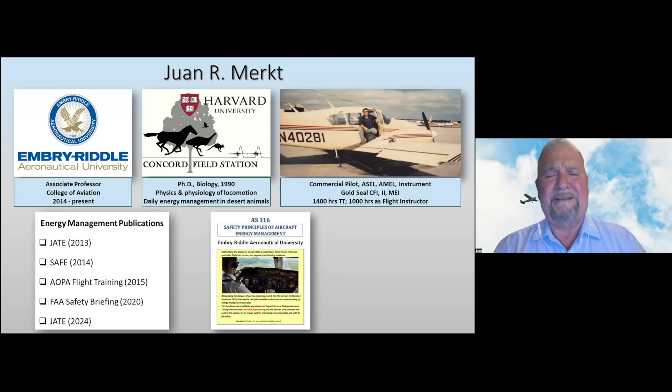Along the way here, I had this incredible opportunity, and I'm so thankful to Embry-Riddle for it, to design and teach my own course on energy management, and I've been doing that since 2018.

At some point I got the opportunity to collaborate with the FAA and other people, and help write Chapter 4, Energy Management. And the article from 2024, the last one I mentioned on the list, Nick is going to put the link to that paper. So if anybody is interested in reading it, please feel free.

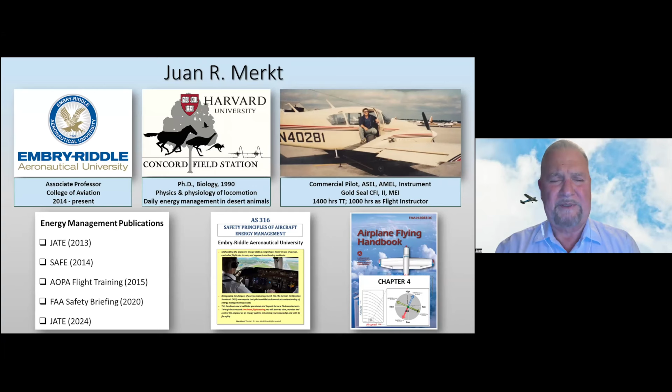Great, thanks. I do want to thank one person especially, Dave Cecil with the FAA, and he might be in the audience here. Dave was an incredible support, both on the chapter and the Airplane Flying Handbook, and he's also a co-author on that latest paper that I mentioned. Anyway, that's a little bit of my background.

So what I'm going to do now is show you an outline of what we're going to be discussing. The first thing is going to be a definition of what MCA is. Now, since energy management is so critical in performing this maneuver, I want to go over some basics, as I call them. To learn more about this maneuver, I'm going to use an approach I call the top-down approach to teaching principles of flight. But I'm going to contrast that first, before I get into MCA, with what I call the traditional bottom-up approach. Once I do that, we'll go through the top-down approach for teaching the essential elements of MCA.

So what is MCA? If you look at the Airplane Flying Handbook, the definition is right there in the glossary: an airspeed at which any increase in angle of attack, or an increase in load factor, or a reduction in power would result in an immediate stall. That really means this is the slowest speed that we can fly without stalling the airplane.

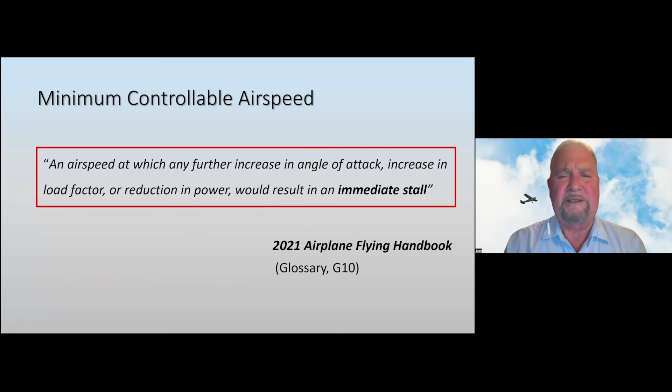Now, as David already mentioned, MCA has been incorporated now into the CFI ACS. What I'm going to show you here is basically just some of the key elements of the tasks in the ACS, not everything, just the important things. As far as the reference, I believe Nick has already posted that reference on the chat.

The first thing is knowledge. Again, there are many elements as part of the knowledge requirement, but the important thing here is that the applicant needs to be able to demonstrate knowledge by describing and explaining the flight characteristics and the aerodynamics associated with this maneuver.

Now, in terms of the skills, the applicant has to demonstrate the maneuver, how to conduct it both in clean configuration and landing configuration. The reason I put the clean configuration in red is because I'm going to be focusing on the clean configuration MCA, just to keep it short, I guess.

The airplane is going to start at some cruising speed, let's say maneuvering speed, and you're going to slow down the airplane and be able to maintain that speed at which any further increase in angle of attack, increase in load factor, or reduction in power would result in an immediate stall. Now if you look at the ACS, the FAA doesn't use the term MCA or minimum controllable airspeed, but you can see the definition matches exactly what's in the airplane handbook as far as MCA. So we know that's what they're talking about.

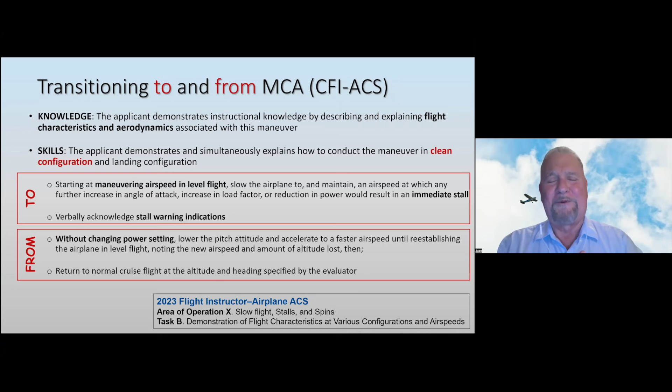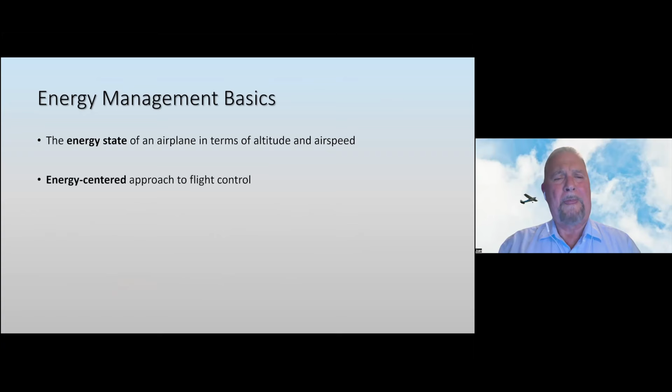I want to go through some energy management basics here, because to me energy management is essential to perform this maneuver safely and effectively. Energy management really is all about managing altitude and speed. Some of the basic concepts I want to cover are: what is the energy state of the airplane in terms of altitude and speed? What's an energy-centered approach to flight control? And once we do that, what is the energy role of the throttle and the elevator to manage altitude and speed? Finally, we're going to put together just 3 simple rules for managing altitude and speed.

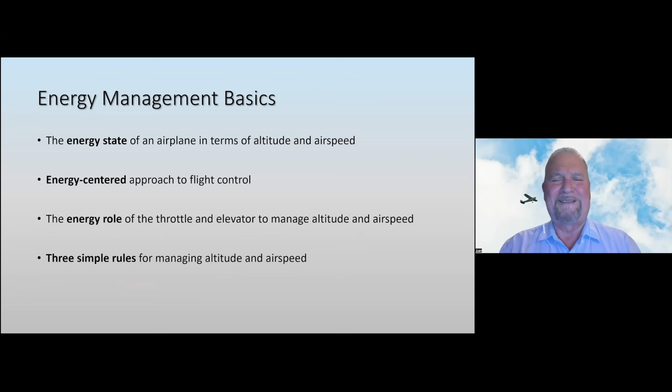So as you can see, everything is about altitude and speed. Let's start with the energy state. What is the energy state of an airplane? It's all about the total energy, the energy in altitude plus the energy in speed.

Again, if we want to visualize the energy state of the airplane, the best thing we can do is show this energy state in a chart that shows you what the altitude and what the speed is. And by the way, I didn't come up with this idea — this goes back all the way to the 1960s. John Boyd, many of you may have heard of him, developed the energy maneuverability theory to help fighter pilots do better in air combat. So it's all about air combat tactics, but to me this is a great way to visualize the energy state of the airplane.

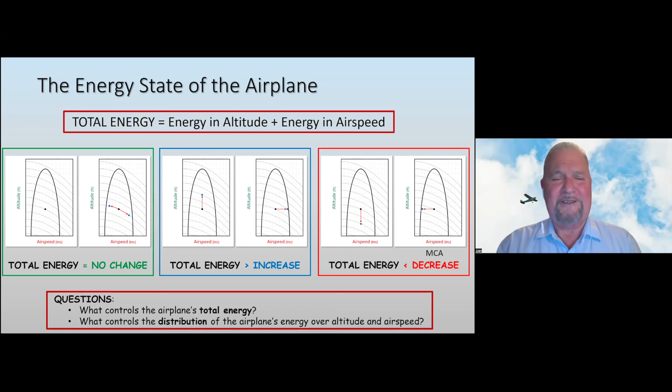So the two questions I have are basically: what controls the airplane's total energy, and especially the change in total energy? And what controls the distribution of the airplane's energy over altitude and speed?

Hold that just for a second there, Juan. I just want to grab a couple of things here in the chat. Okay, somebody's saying, what are the lines on the energy map, constant energy?

So I think you define that. Yeah, that movement on the left one is constant energy. These curved lines here are actually called energy height lines, and they represent the energy exchange trajectory. So when you're trading altitude for speed or speed for altitude, the airplane will follow that trajectory, and you're not changing the total energy, you're simply exchanging energy.

So you're going to be either losing altitude to gain speed, but the total energy stays the same, at least initially, or trading speed to gain altitude, in which case you're losing speed to gain altitude. So the total energy stays the same.

Again, somebody asked, is the horizontal line true airspeed or indicated airspeed? That's probably not really going to matter. Yeah, no, it doesn't really matter. Okay, we should keep moving so we get through all this.

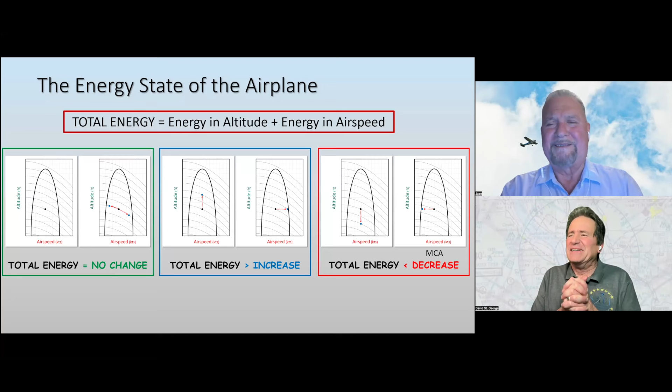I know you've got the two questions here. So I'm actually going to now focus on what I call an energy-centered approach to flight control. And the diagrams I just showed you, we're going to come back to those as we make the case here. But the point here is this: with an energy perspective, the apparent contradiction in the role of the controls can actually be resolved, making it easier for new pilots to master altitude and speed control.

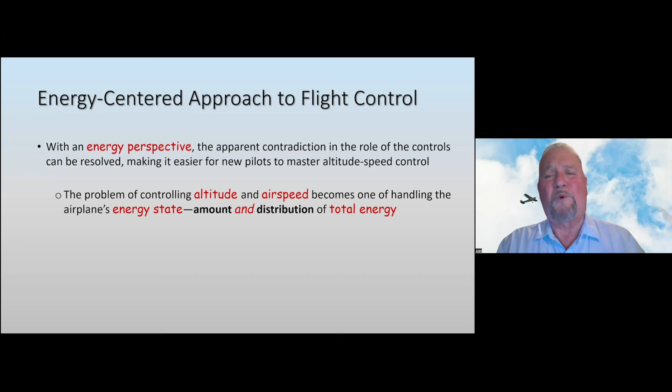The problem of controlling altitude and speed then becomes, from an energy perspective, one of handling the airplane's energy state. That's the amount and the distribution of total energy. So instead of asking what controls altitude and what controls airspeed, we should actually ask what controls the airplane's total energy and what controls the distribution over altitude and speed. I know this might sound a little abstract right now, but let's put this in a way that we can visualize what's going on here.

And what I'm going to do here is use an analogy. First of all, I'm going to show you the primary role of the controls. This is the throttle. The throttle, by changing thrust, is actually the total energy control. And the elevator, by changing pitch, is actually the energy distribution controller.

Now what I'm going to do is use an analogy, as I said before, to show you exactly what is going on here with the throttle and the elevator. This is a reservoir analogy. As you can see, the airplane is going to gain energy coming from the engine in the form of thrust. The throttle controls thrust. And the airplane is going to lose energy through drag.

Now, obviously, if you increase the amount of thrust over drag, if you add power, if you make thrust more than drag, you're going to have an excess amount of energy that is going to go into either speed or altitude. Now, which way is it going to go? That depends on the elevator. The elevator is going to be there to transfer that excess energy into either speed or altitude.

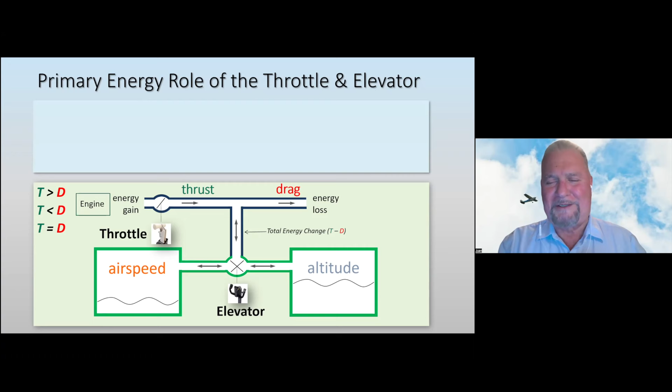Okay, now one way that we can make sense of this a little more without getting too much into math - this is a very simple equation, I guess. It's an energy balance, okay?

It simply tells you that the difference between thrust and drag is going to determine a change in total energy. If you make thrust more than drag, you have a positive excess amount of energy that can go into speed or altitude. If you have less thrust than drag, that's going to be a deficit, and the airplane's going to have to lose energy.

Now, on the right side, you actually have the distribution of the change in energy - the change in energy distribution in speed or altitude, okay? Now, the throttle controls the left side of the equation, and the elevator controls the right side, okay?

So again, hopefully that starts to make sense. And that's a good slide to take a screenshot of, because it makes sense. It puts the whole thing into context later. Yeah, I love that analogy, Juan.

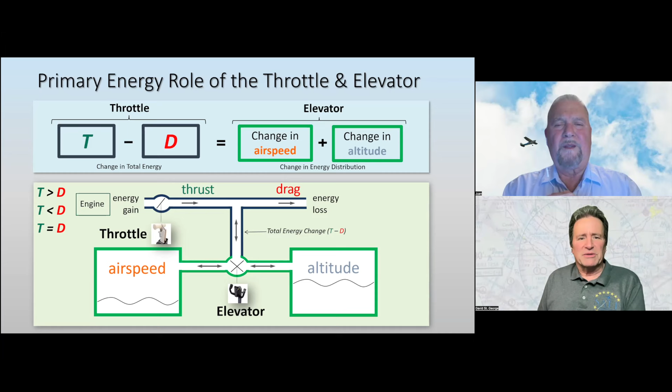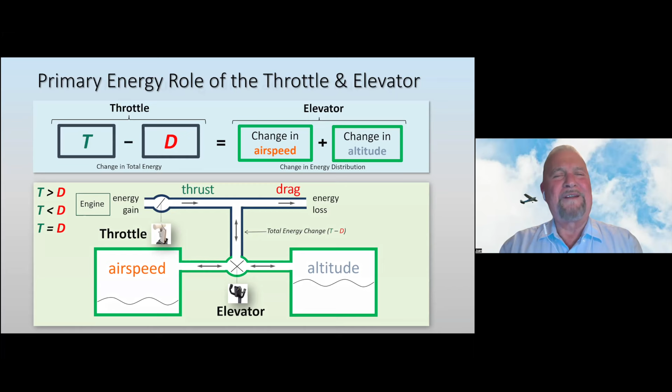That's perfect. Thanks. Now, one thing though is, and actually you asked me to put the slides that I'm going to be showing you now back. There is a little bit of confusion as to the role of the controls. I understand that, okay, but so I'm going to address that right now.

There is actually a power pitch coupling that can lead to confusion, okay? And this is the problem here. It actually has to do with the thrust line and whether the thrust line is below the center of gravity of the airplane or whether it's above, and I'll show you that in a sec.

But because of the thrust line in many airplanes, like the Cessna 172, is actually below the center of gravity, when you add power and you increase thrust, the nose is going to pitch up too.

But what if you're flying an airplane like this, where the thrust line is actually above the CG? When you add power in this airplane, the nose is actually going to pitch down. So the point here is that...

What is power doing and what is pitch doing? If you see both happening at the same time, we need to make sense out of that. And one way where you can actually...

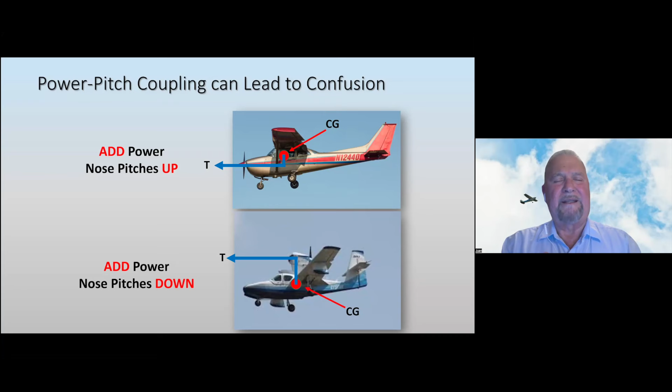Understand the independent role of the throttle in changing power and the elevator in changing pitch is by actually doing something that I've done in my class, and I've actually even tried it in the Cessna 172, and it seems to work pretty good.

That is to demonstrate the primary role of the throttle and the elevator, okay? But to do this, you have to make sure that the airplane is maintaining a constant altitude and speed, you're trimmed, you're stable, right? And then we're going to do this.

First, you might want to change the throttle setting, but you're going to keep the pitch constant. That's the key. You might actually have to, if you add power, for example, push forward on the elevator just to keep the nose where it is. And with the elevator, we'll do this all the time, right?

All we need to do is just change the pitch and keep the throttle constant. Okay, so see what happens. Let's look at the throttle first. When you change the throttle and keep the pitch constant, this is what you will see. When you add power, both altitude and airspeed increase. And when you reduce power, both altitude and airspeed decrease.

Okay, now if we do the same with the elevator, by changing the pitch without changing the throttle, we know this: you pitch up, altitude goes up, speed goes down. If you pitch down, altitude goes down, the speed goes up.

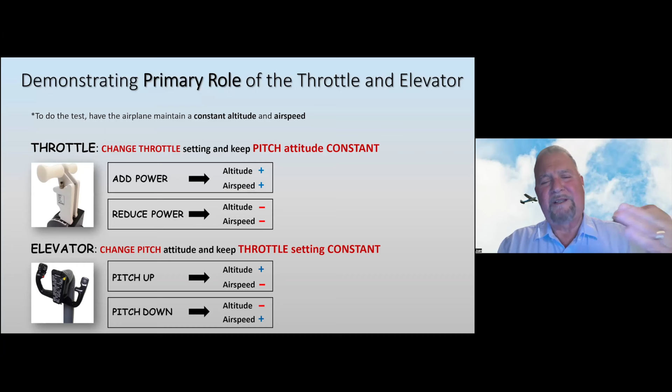In other words, you can see that the throttle is there to change the airplane's total energy, but not the relative distribution - they both go up or down in the same direction. But when we do the same with the elevator, the relative distribution is going to change - one goes up, the other one goes down, right? But the total energy, at least initially, in the short term, actually stays the same.

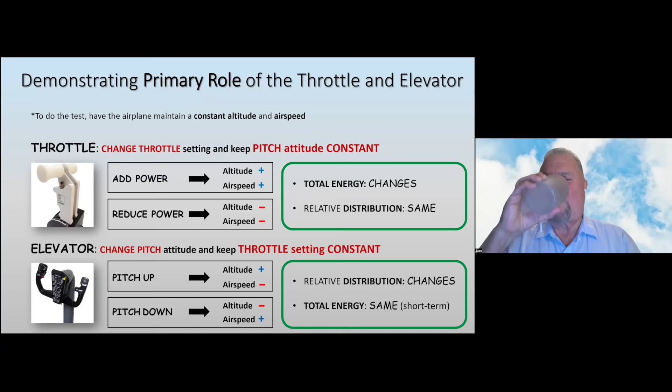As I've said many times about the short term, when you change the pitch and you change the speed, what happens is that eventually drag is going to change. That's going to affect the T minus D, the thrust minus drag, and you might actually increase or decrease the airplane's energy by changing the drag.

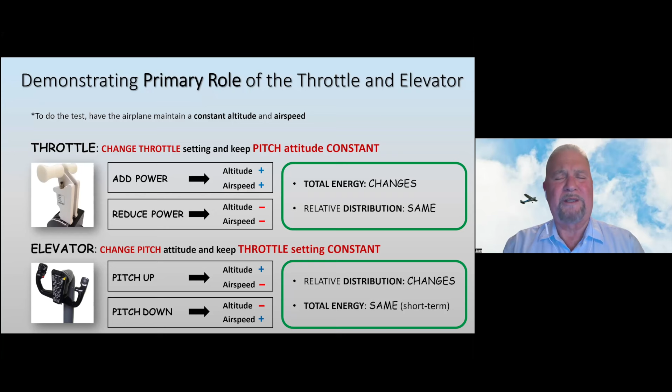So this is one way we can demonstrate the independent role, the primary role, of the throttle and the elevator. Now I'm going to go back to the energy maps I showed you before, the altitude and speed map, because I think those are really useful to visualize the role of the controls, the primary role, and how you can integrate them to take the airplane from one energy state to another.

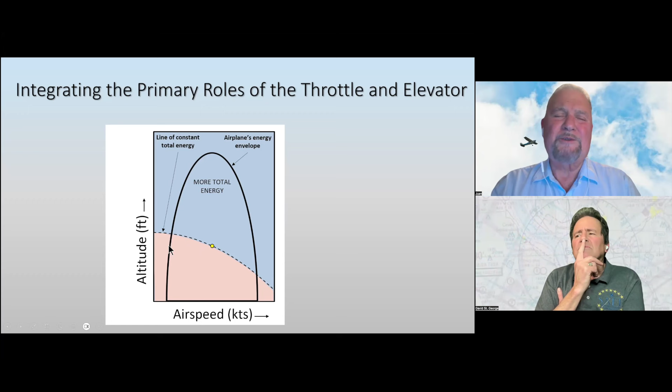That's just the limitations on the plane, the envelope, the energy envelope, yeah. The black line would be stall on the left and VA, or VNE, on the right—it can't go faster. On the right would be your maximum cruising speed. On the left side, stall speed may actually come before this dark line. This whole envelope is based on excess power, and excess power at this edge of the envelope is zero. So this is your maximum speed, that would be your minimum speed, and the same thing, that would be your maximum altitude you can reach in this airplane.

Okay, thank you. That was just... anyways, thanks chat.

So let's suppose we're here where the yellow dot is. Anywhere above that, in blue, is going to require more energy, more total energy. And if you want to go anywhere in the pinkish red zone, that's going to require less total energy.

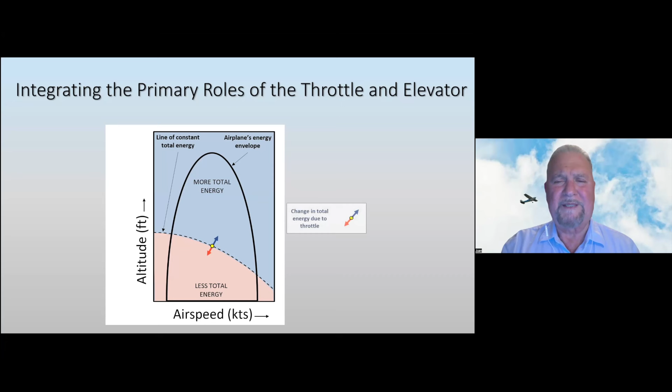Now, if you look at what the throttle and the elevator are going to be doing: this is the throttle. The throttle can increase or decrease total energy—that's changes in total energy due to the throttle, you add power or reduce power. The elevator, on the other hand, is going to be along the energy exchange line, on both sides, as you can see here. That's the change in distribution due to the elevator, pitch up and pitch down. So those are really the independent roles of the controls.

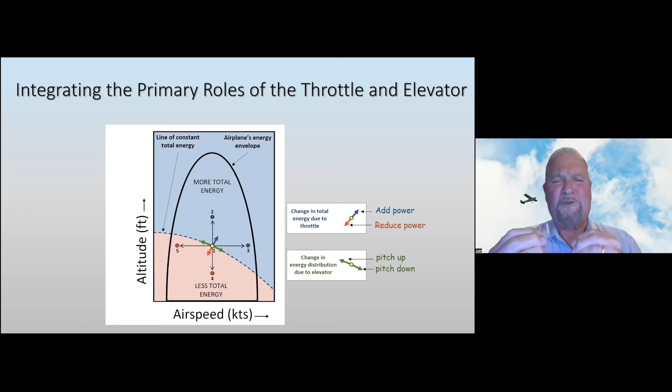Now, obviously, as we go through MCA, you're going to see this is going to be a little more complicated. Yes, we're going to reduce the power, but at some point, as you enter the backside of the power curve, we're going to have to do something different there. But anyways, I just wanted to show you that you can actually use this energy map to visualize both the primary role of the controls, but also how you can use them to move from one energy state to another.

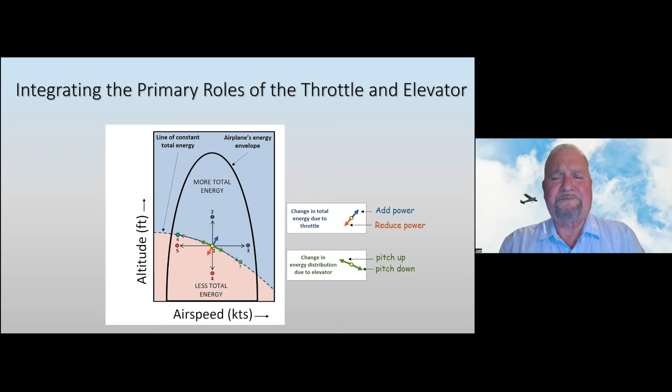I think we can actually put this together into these 3 simple rules, if you want, for controlling altitude and speed. Rule number 1: if you want to climb at a constant speed or accelerate at a constant altitude, you're going to need more total energy.

So throttle up. If you want to go from 1 to 2, climb at a constant speed, you're going to pitch up. If you want to accelerate from 1 to 3 at a constant altitude, you're going to gradually pitch down. That's rule number 1.

Rule number 2: again, if you want to descend at a constant airspeed, or decelerate at a constant altitude, which requires less energy. And by the way, in 1 and 2, we're actually climbing at a constant speed, accelerating at a constant altitude, or descending at a constant speed, or decelerating at a constant altitude without exchanging energy. That's the key. So that's going to require more total energy, or less energy in this case.

You're going to throttle down, and 1 to 4, you're going to pitch down. 1 to 5, you're going to gradually pitch up.

And the third rule is simply when you want to trade one for the other. So 1 to 6, as you can see if you look at the diagram here, we want to trade speed for altitude, or we want to trade altitude for speed. The throttle is not going to change. You're not going to change your throttle setting. You're going to keep it the same. And you pitch up, you pitch down. That's it. So those are the 3 simple rules for controlling altitude and speed.

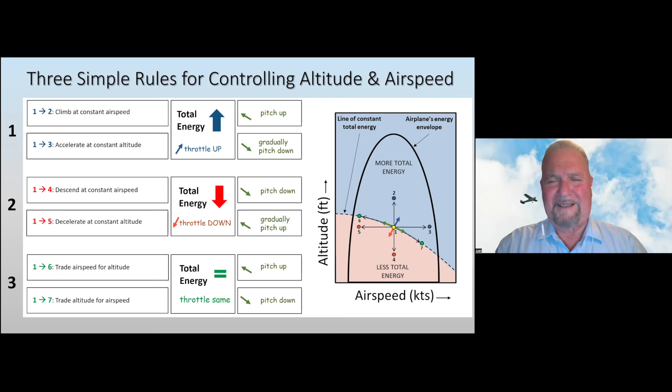All right, so with that, that's the energy management basics, if you want. Some of the key concepts in terms of what's the energy state of the airplane, what's the role of the controls, and how we can put together the role of controls to take the airplane from one energy state to another one.

So what I'm going to do now is show you 2 approaches to teach principles of flight. As I said before, MCA is actually a great maneuver to not only describe how you control the airplane as you fly the maneuver, but also how to explain the underlying principles and look at some of the safety risk factors involved. But again, there's 2 approaches here to teaching principles of flight.

One is the bottom-up approach, and I call this the designer-oriented approach, or an engineer approach. Let's say you want to design a new airplane—you have to start by understanding the underlying principles, the air properties, the properties of the atmosphere: pressure, density, temperature, and so forth.

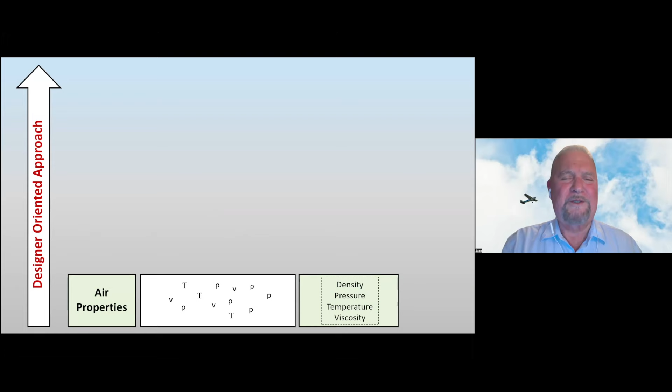Once you do that, you can see what happens at the airflow level, right? As you are trying to design this airplane and come up with the right design, you can look at the forces. But at the very end of the process, you're finally going to have a prototype that you can test, and you're going to be measuring the performance of this airplane and see how it flies. Okay, so that's the traditional designer approach.

But guess what? If you look at any book right now on aerodynamics or principles of flight for pilots, this is usually what you're going to see.

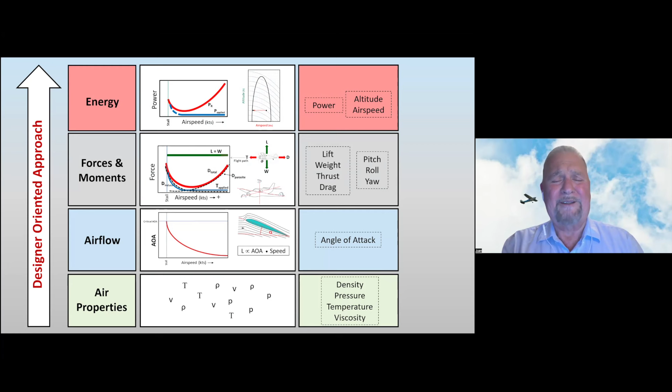Okay, in my view, I think it might be better off to start at the top. This is my sort of top-down, pilot-oriented approach. You start at the energy level, looking at what you're doing, which is all about altitude and speed. This is the maneuver we're going to be flying. You can look at the power curves.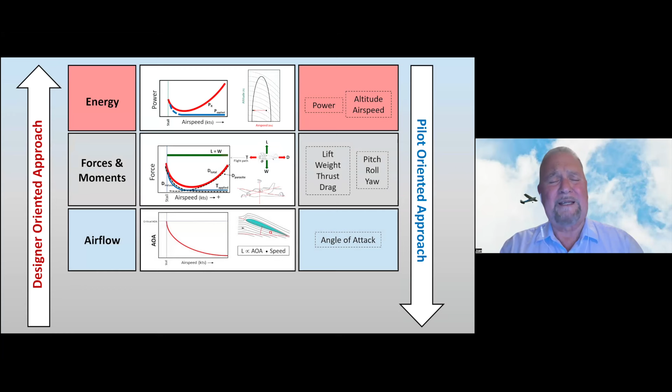Now, to understand what is going on here, we can drill down as needed to explain what is going on at the top level. We could keep drilling down to the airflow level and even down to the air properties. Today, I'm going to be doing that, but not going all the way to the properties. We're going to stop at the airflow level, as you will see.

Now, again, the bottom-up approach has some problems, and I can understand. And David, you told me this before. Many instructors and pilots don't like aerodynamics, and I think part of the problem is the way we teach it normally, the traditional way. Oh, I agree. As soon as you get the Greek letters out, people fall asleep.

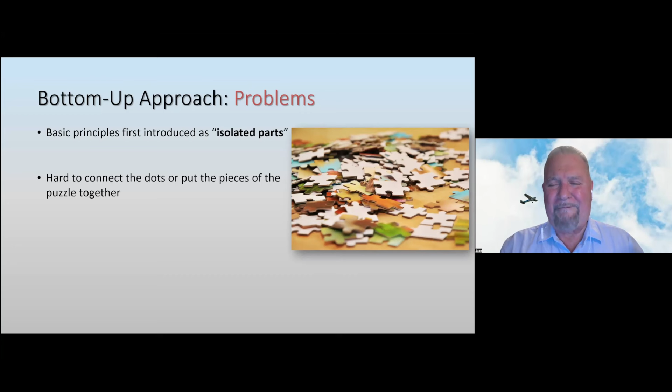So what I'm going to do here is use another analogy. Assume that I'm going to bring you a puzzle. I'm going to throw the pieces of the puzzle on the table, but I'm not going to show you the picture on the box. I'm going to ask you to put the pieces together. That's a problem, because it's going to be hard to connect the dots, to put the pieces of the puzzle together. You don't see what you're building here. You don't know the big picture yet. In fact, the big picture is going to be given to you at the very end of the book or the course. And the big picture in this case is performance, right?

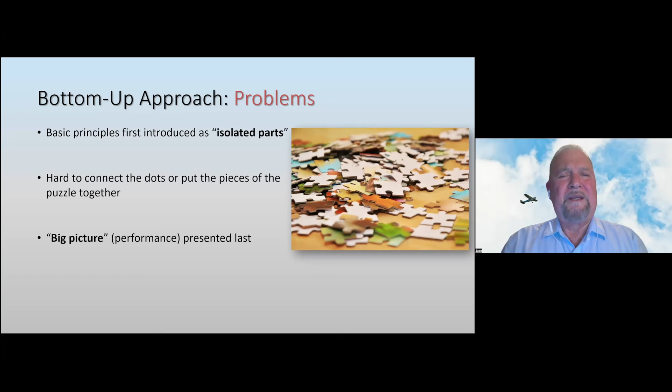So, using a top-down approach, I think these are some of the benefits. For one, I'm going to show you the big picture. Look at that, that's a puzzle, okay? But you can see what the picture is. That's what we're aiming for. But not only that, this big picture is going to be given to you in the context of performing a specific maneuver, just like MCA, for example.

So as we drill down, the principles at each level are going to be introduced in relation to the context of the maneuver that we're performing. I think it's going to be easier then to see how the pieces of the puzzle fit together, because the principles are going to be presented in an understandable, meaningful, and cohesive manner.

So with that, let's use the top-down approach to teach the essential elements of MCA. What I'm going to be doing here is show you how we can use this top-down approach to understand the integrated role of the controls as we perform the maneuver.

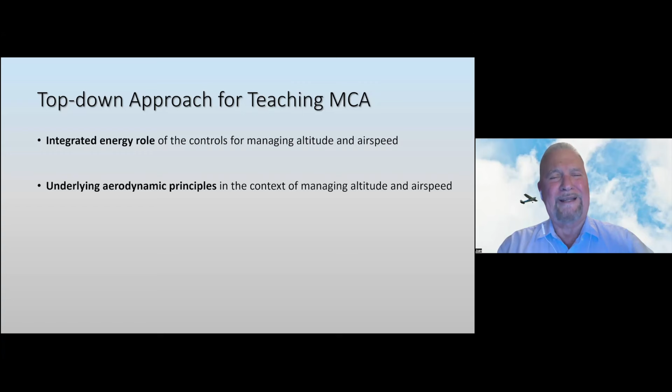We're going to look at the underlying aerodynamic principles in the context of flying this maneuver. And finally, we're going to be able to address some of the safety risks in a better, more cohesive way, so that students can anticipate some of the challenges they're going to encounter as they perform this critical maneuver, or any other critical maneuver.

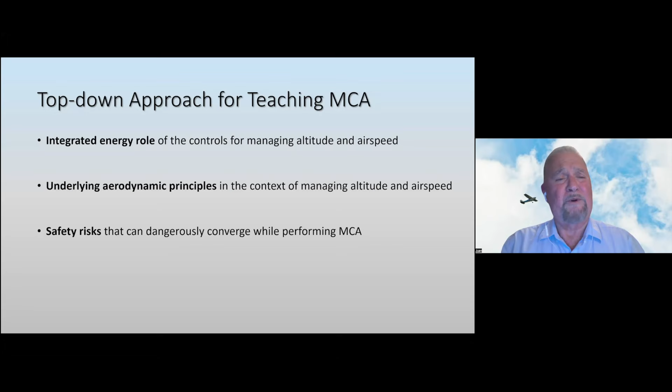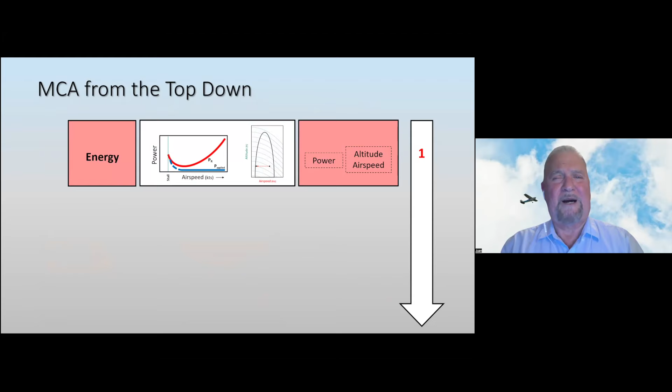Again, transitioning to MCA now, this minimum controllable airspeed. It really boils down to slowing the airplane from cruising speed down to an airspeed just above stall, while maintaining a constant altitude. I'm going to be doing this again from the top down, looking at the forces, looking at the energy level first, the power curves, the altitude and speed, getting down to the forces, and finally down to the airflow level.

Now, at the energy level, this is where we are: altitude and speed. That's why I find that energy map really useful, because it clearly shows you what we're doing as we perform this maneuver. You're going to start at some cruising airspeed here, and you're going to slow down as you maintain altitude.

Now, how do we do this? Let's try to pretend that we're going to be flying the airplane right now. So I'll pretend you have one hand on the throttle, right hand on the throttle, left hand on the yoke. So how do we do this? Well, the first thing we're going to do is reduce the power.

I'm going to throttle down, as we said before, as we were talking about the rules for managing energy here. So I'm going to be throttled down, and then slowly and gradually I'm going to pitch up, right?

Now, one thing you might notice if you pay attention to the airplane and the instruments: if everything is going well, you're maintaining a constant altitude on the altimeter. Looking at the speed, initially as you throttle down and gradually pitch up, you're going to see the tape or needle move really fast. So the rate of deceleration initially is going to be pretty high. The airplane is going to be slowing down rapidly.

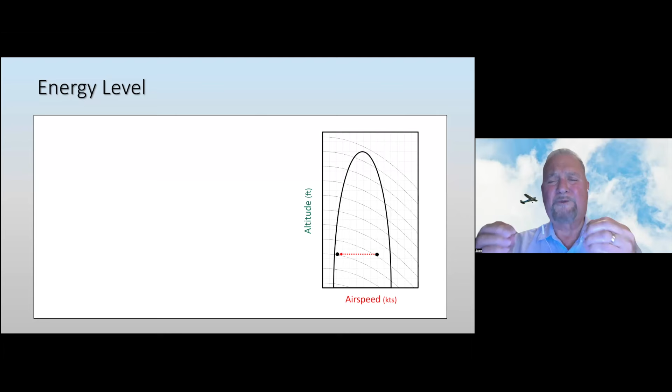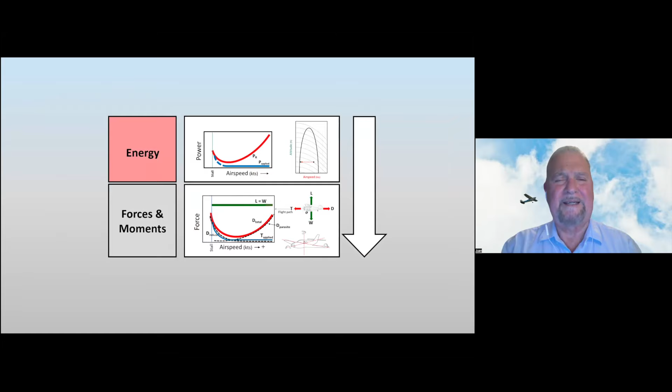Question for you: why does power required decrease on this front side, and increase on the back side? To understand that, we need to go down one level, to the force level. This is the four forces of flight. Usually what we're told is lift equals weight, thrust equals drag. But there's a lot more to the four forces, and how they interact as you're flying this maneuver.

Here we're actually starting at a cruise speed, and I'm going to slow down right to the left. The first thing you're going to notice, something you probably won't see in any books, is that lift, the green line here, stays constant as you slow down. Why? Because to maintain altitude, lift has to balance the airplane's weight. If the airplane weighs 2,500 pounds at 100 knots, it's going to weigh 2,500 pounds at 40 knots. So you have to maintain the same amount of lift because the weight hasn't changed.

The other thing you see here is the total drag curve - as you can see, it's a U-shaped curve. That explains why the power curve is U-shaped as well. The reason the drag curve is U-shaped is because there are two forms of drag. One is parasite drag, which increases as you go faster or decreases as you slow down. That's the type of drag we're all familiar with - you're driving your car, stick your arm out the window, the faster you drive, the more cool you feel on your arm. That's parasite drag.

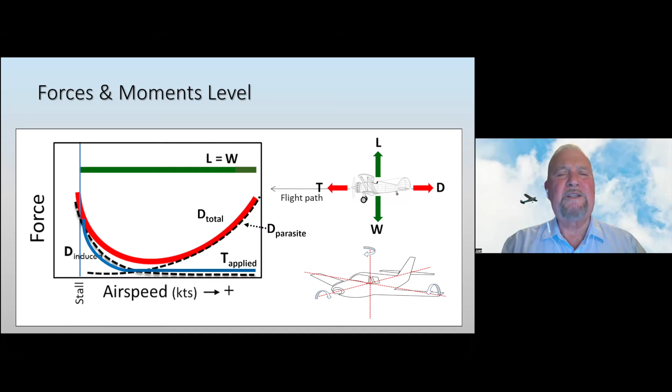The question is, why do we have to do that? We have to do that to maintain lift constant, because lift is a function of angle of attack and airspeed, and that's what you control. There are a few other things that are part of the lift equation, but those are the two important ones. So when speed decreases, if you want to maintain lift constant, you have to increase the angle of attack. That's it. That explains why angle of attack increases.

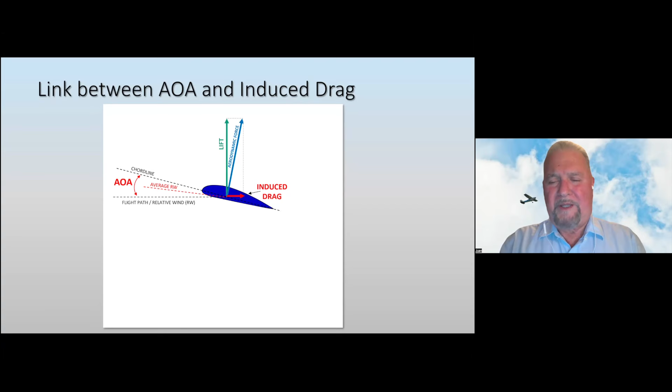Now, if we increase the angle of attack, what you're going to see is this: the wing is flying at a high angle of attack, and therefore the aerodynamic force is going to be tilted backwards more. And if you look at what happens, that's going to increase induced drag. So that explains why, as you increase the angle of attack, this backward force, induced drag, will increase.

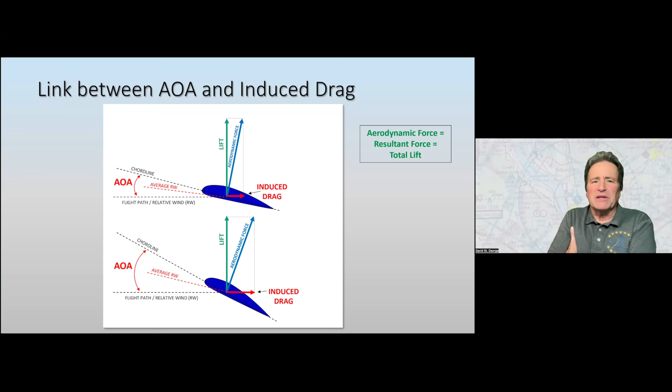This is a huge safety issue. This is the great mystery. When a new student or client comes in, they think power makes speed, but no amount of power is going to get you back flying when you're on the induced side of the power curve.

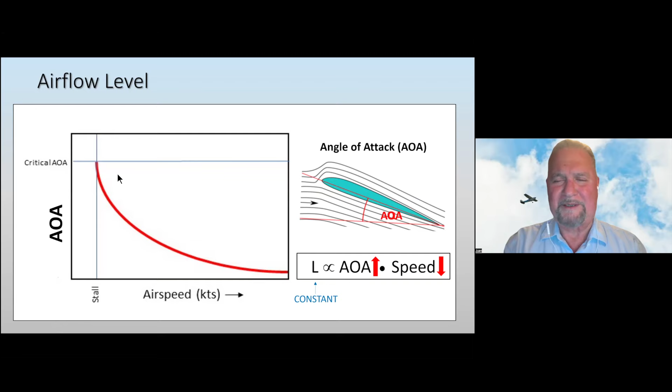Now I want to get back to the previous diagram quickly and show this: as we slow down and increase the angle of attack, you got to be careful, because you're starting to get very close to the critical angle of attack. But now that we understand there's a direct link between angle of attack and induced drag, we can see what is going on here. As you increase the angle of attack while slowing down, in order to maintain lift constant, that's going to increase the induced drag. That explains the backside of the drag curve, and it also explains the backside of the power curve.

So that's pretty much it in terms of how you're flying the maneuver and what's happening in terms of the underlying aerodynamic principles that explain exactly how you are controlling the airplane to maintain altitude as you slow down.

So some of the key takeaways of all this, I guess, is changing pitch and power are closely integrated during the transition to MCA, as you can see. The initial power reduction, making thrust less than drag, and the gradual increase in pitch attitude, which gradually increases angle of attack, allows the airplane to slow down while maintaining altitude.

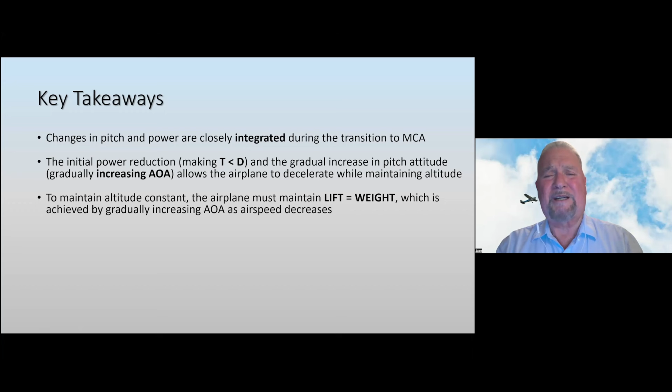To maintain altitude constant, the airplane has to maintain lift. It has to balance the airplane's weight. And since the weight is not changing, lift is going to remain constant. So the key is, how do you maintain lift constant? You can do that by gradually increasing the angle of attack as the speed decreases.

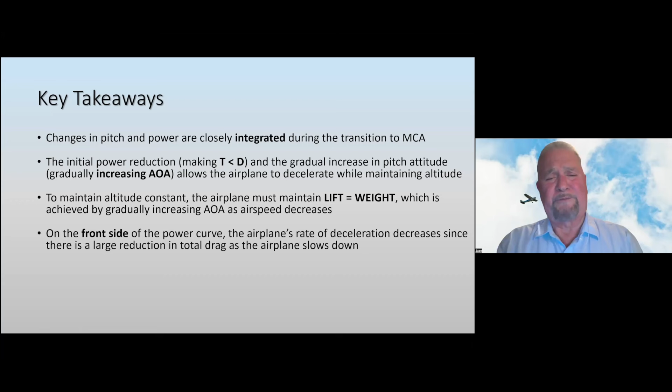On the front side of the power curve, the airplane's rate of deceleration is going to decrease since there's a large reduction in total drag as the airplane slows down, because parasite drag is decreasing. On the backside, the drag is going to rapidly increase as the airplane continues to slow down. You must gradually increase power, not to climb or accelerate again, but to keep the thrust just below drag to avoid a rapid deceleration.

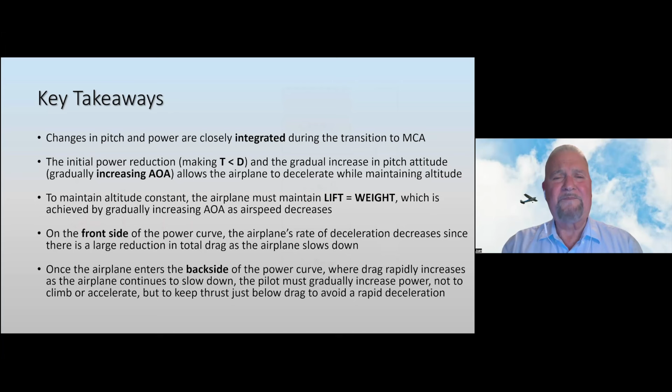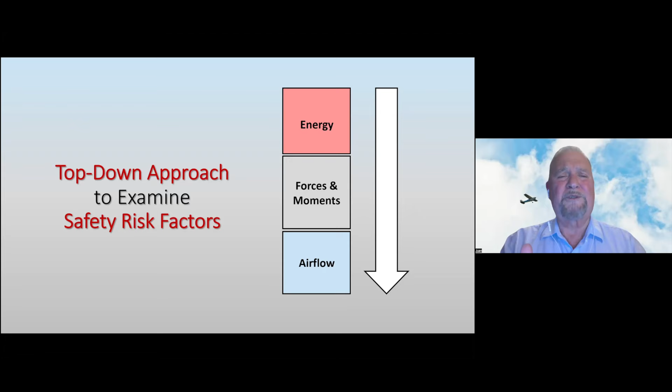Now, hopefully you have a better understanding of not just how you're controlling the airplane as you fly this maneuver, and some of the underlying aerodynamic principles that explain things better, but you can actually use this top-down approach to examine some of the safety risk factors involved here. And there's three risk factors.

One is energy mismanagement, obviously. The other one is poor angle of attack control. And the third one is actually degraded flying quality.

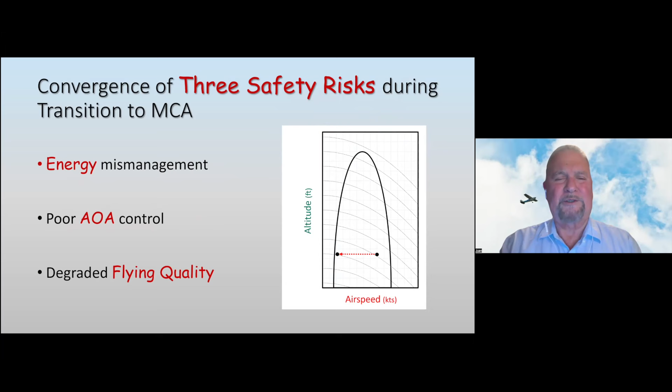We may not have heard this term that often. Actually, this is used primarily by test pilots to determine how difficult it is to control altitude and speed, to control the airplane under certain conditions. And they're saying here that flight quality is going to be... let's take a look at this.

So again, using that top-down approach, we can see how the three things converge. Energy mismanagement is going to be critical. We're talking about altitude and speed control. We're going to be slowing down. On the backside of the power curve, you've got to be really careful. You have to increase power just enough as you continue to increase your pitch.

There can be problems with altitude. If you pitch up too fast, too much, you're going to start gaining altitude. If you don't pitch enough as you slow down, you must start descending. So altitude and speed control is going to be very important here.

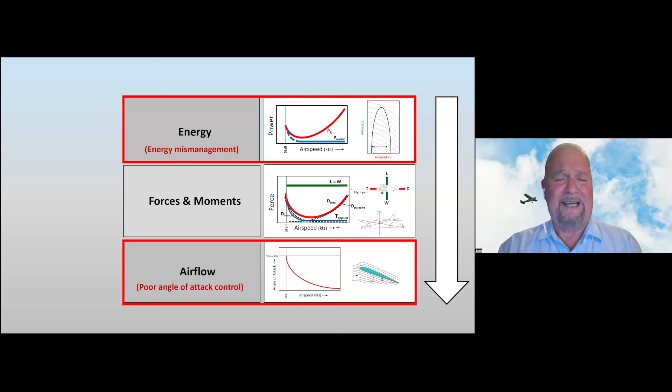At the airflow level, obviously we have the angle of attack. And poor angle of attack control can be an issue, actually, because you can stall the airplane. But what about this degraded flying quality?

Well, the key is that this degraded flying quality, which affects the airplane's stability and control, can affect the airplane at any of these levels. At the energy level, on the backside of the power curve, the airplane actually has speed instability. Anything that slows the airplane down is going to slow it even more. So it's going to require really fine pitch and power coordination here.

Now, at the force level, let's say we're flying a Cessna 172, a single-propeller airplane here. This is actually the forces and moments level, because we're talking not just about the forces, but how the airplane can rotate around the three axes. And things could happen here. You might be familiar with what can happen if you're flying really slow and you start adding a lot of power on the backside of the power curve. It could happen on go-arounds, for example.

And we call these stability tendencies, for example, left turning tendencies. So the airplane might have a tendency to yaw to the left. You're going to have reduced roll and yaw stability. And in this case, as we said, in a single engine prop airplane, the airplane is going to have a tendency to yaw to the left. You're going to have to step on the right rudder.

So wait a minute, are you telling me that I have to have really fine pitch and power coordination, but now I also have to step on the right rudder? How much? Whatever is required to maintain the airplane straight. Too much rudder, you're going to yaw to the right. Not enough, you're still going to yaw to the left. So just enough. Really careful yaw control is going to be important.

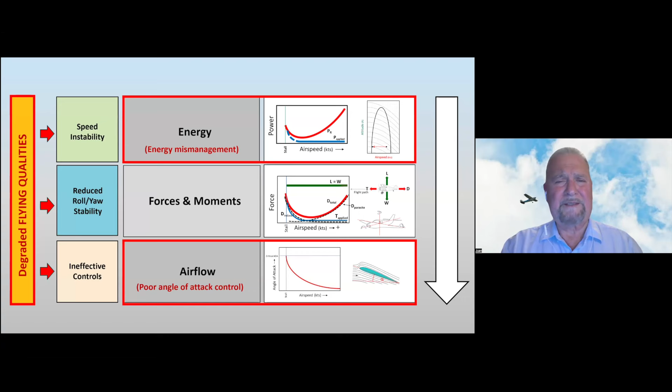So that's that. So what I'm going to do now, we're getting down towards the end I guess. Only two minutes over, David. No, that's okay, we should just go to the safety aspects and wrap it up. I've got a lot of questions here, people are asking. But anyways, I'm just briefly going to mention the transition from MCA back into cruising flight.

And if you look at the ACS, the FAA actually requires that you don't change the power setting. You simply lower the pitch attitude and accelerate to a faster speed until you reestablish the airplane in level flight, noting the new airspeed and the amount of altitude lost, and then you can return that back to normal cruise flight at the altitude and heading specified by the evaluator.

Now let me just interject, somewhere in the chat is Dr. Donna Wilt's explanation of this maneuver. She was the one at SAFE who is on the ACS committee, and she was the one who had it put back in. There's a Word doc, and Nick already loaded it a couple times into the chat, but it takes this apart and explains it, because a bunch of DPEs were all sitting at the booth at Oshkosh saying, what is this? How does this work? And so she sent a two-page explanation, and I think it's a genius maneuver.

Yes, but the important part is what Juan's going to talk about now is how do we accelerate out of it. So this brings up the second role of the controls. The controls are going to be performing their primary roles as I described before, power for total energy and elevator for redistributing that change in total energy into either altitude or speed. But sometimes it's going to be useful to use the elevator in this way, and this is the second role of the elevator, and that is to indirectly decrease drag in thrust minus drag.

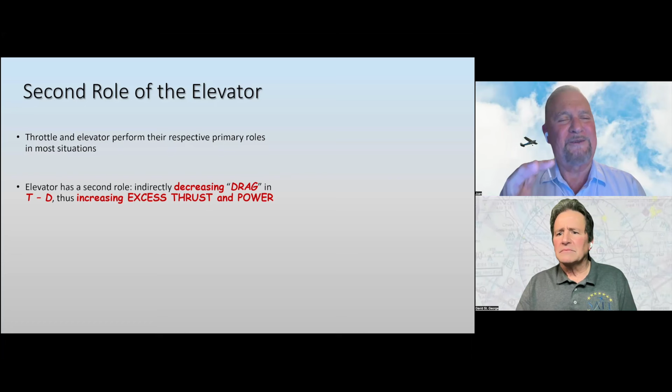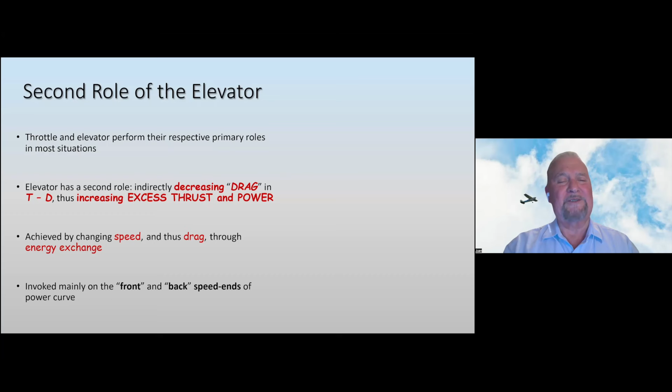So what happens here, if you decrease the drag, you're actually going to increase the excess thrust that you have and the excess power, and that's important. How do we do this? By changing the speed, and thus drag through energy exchange. So it's an energy exchange maneuver, okay, and we're going to be doing this either on the front or the back speed ends of the power curve.

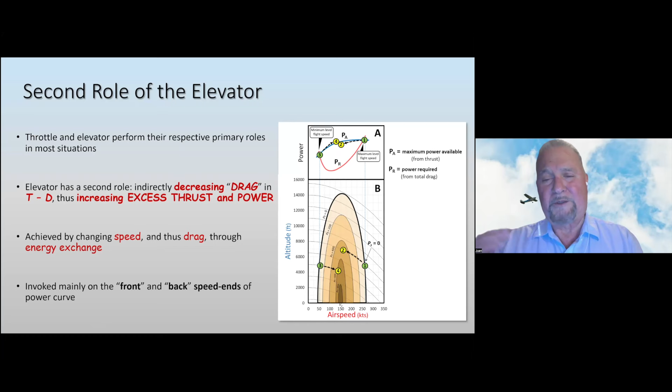We're going to be losing some altitude, not much actually on this end. We're going to give up some altitude to gain speed, but by gaining speed, you're not just gaining speed, but you're gaining power, excess thrust, which you can use now to accelerate or to even climb if you want, okay?

So this is basically the recovery maneuver as explained in the ACS. We're here, number one, and we're going to maintain the same power, but we're going to be able to accelerate to the speed. Number two, how do we do that? Simply by exchanging altitude for speed, as you can see here.

And once you get to a speed where you have, in this case, the maximum excess power for that power applied that you have, which might be close to Vy, for example, at that point you can actually climb. And once you reach your initial altitude, you can accelerate simply by pitching down and gradually pitching the airplane down as it goes to point number 2, where you reach power required now equal to power applied.

So as you can see, you can go from one side to the other of the power curve without changing power. Okay, so yeah.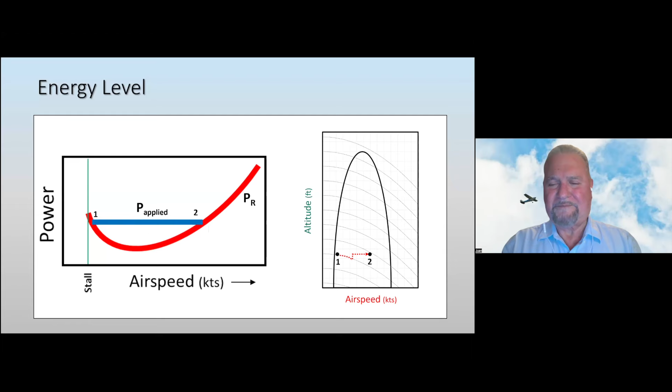So some of the takeaways as far as the recovery, or the transition from MCA, as we said, we're going to maintain constant power while pitching down.

And I think this is Donna's contribution here. This is a really safe strategy because it correlates better with stall avoidance and recovery, and it's something we can teach students. If we're flying this maneuver and the airplane stalls, you're going to pitch down.

What we normally do is simply explain the recovery from the stall in terms of reducing the angle of attack. But in terms of energy management, you're not just reducing the angle of attack, you're increasing your speed, and that speed should be a target speed, the speed that is going to give you excess power.

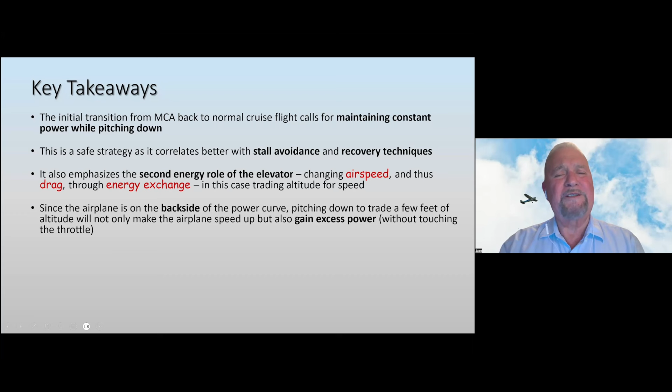Again, we're going to be doing this using the elevator, the pitch, to do this. And since the airplane is on the back side of the power curve, pitching down again is going to cost a few feet of altitude, but not only are you getting speed, you're also going to gain excess power in doing that.

Once the airplane reaches a speed that provides sufficient excess power, let's say VY, you can pitch up and begin climbing while maintaining a constant airspeed, then pitch down once you reach the desired altitude, and gradually decrease the pitch until the airplane accelerates while maintaining altitude until it reaches the steady speed. And that's pretty much it.

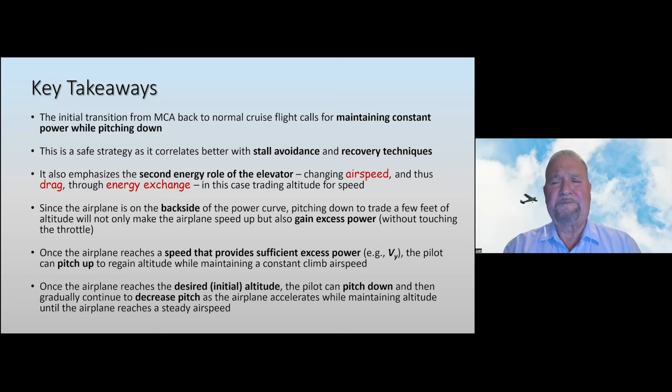Okay, well thank you, I think we've escaped from minimum controllable airspeed. But I've been through this now with you, Juan, like three times, and every time it gets more clear. I hope we'll have this up on YouTube in a couple of days so everyone can go through it again.

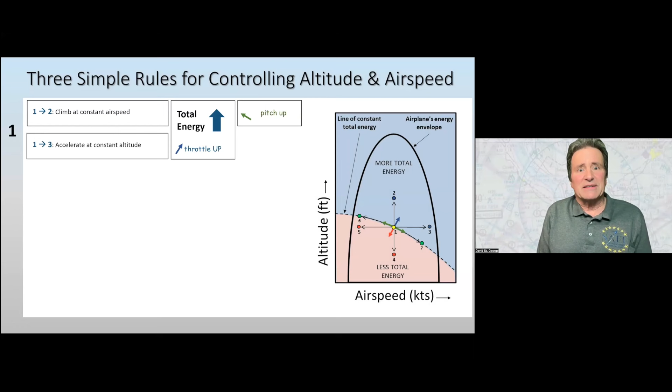The big thing about understanding why this came back into the CFI ACS is to understand that the FAA really does want every instructor to be able to demonstrate this to every pilot. It's not just for instructors. The fact that it's in the ACS means every instructor has to train to proficiency in this, whether or not it's tested, and they should demonstrate it to pilots because it's a critical skill.

I could just tell you, I was taking off at a grass field with a private pilot student, and we would always train them on a real grass field, but there were wires at the end. So of course he hauls the nose up really high to try to clear the wires. And to clear those wires, what we had to do was force the nose down, just like that picture you saw initially, where you were in the waiting room.

We had to force the nose down, get some airspeed, get it to VY, and then it would climb over the wires. I actually had to put my foot up on the bar under the panel to get enough force. I thought, because once we were airborne, we were committed. We were either going to go under those wires.

But until you understand induced drag — and every pilot has to understand induced drag — so, and Dr. Wishmeyer is on board, he's an MIT PhD in aerodynamics.

And Dr. Ed wanted to know, he said, well you didn't tell me what reverse command was. The way I usually explain that is just to say it takes more power to fly slower, and it's counterintuitive for a lot of people. And if you subscribe to one of the dogmatic approaches to what controls what, then you get into this kind of enigma when it goes into induced drag, and you say, well I can't power for airspeed anymore. When I go slower than minimum drag, everything changes and it reverses.

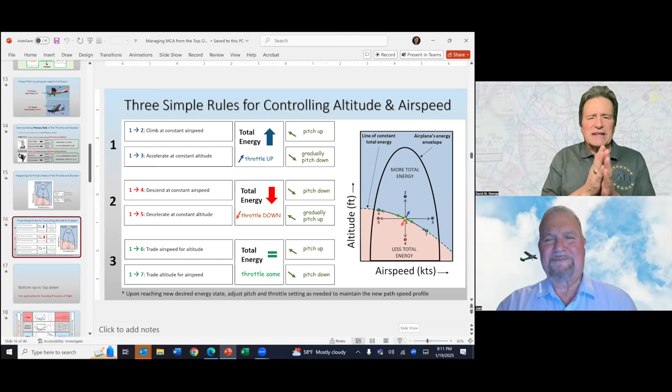Well, not really. If you understand the controls and energy management the way Juan has explained it, there's no reversal, and physics doesn't suddenly flip over and change. It's all very consistent. What people don't understand is the phenomena of induced drag and how the vector is actually pulling backwards — there's a vector that's pulling us backwards.

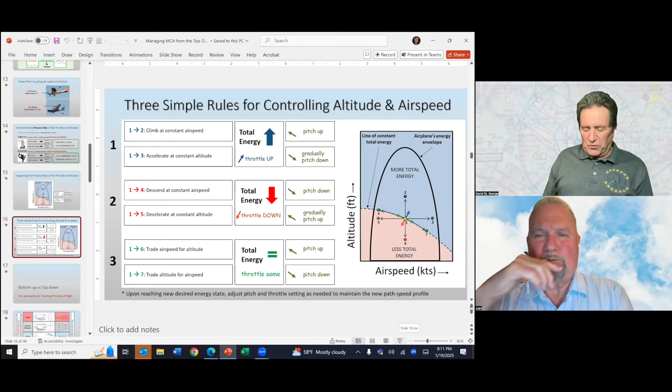So here's that slide, the 3 simple rules somebody asked for. Somebody asked if this maneuver is flown with the stall warner going, and it absolutely is. That's the change that happened with getting back into an ACS: yes, we're flying with the stall warning singing the whole time, just like we used to. I've been examining as a DPE for 28 years now, so you can think about how long I've been teaching and how long since I've been flying. It's like you get to be an old guy.

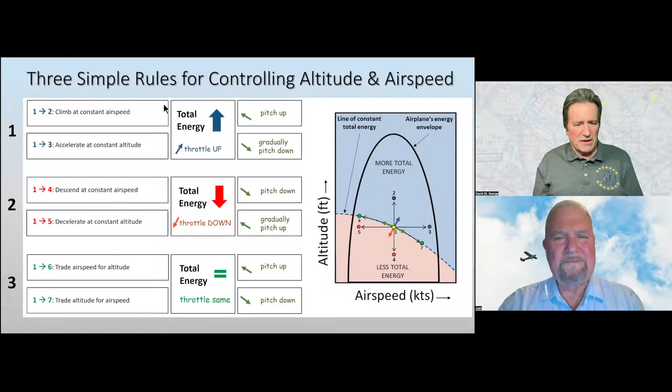But yeah, the stall warner used to always be on in what we called slow flight, so that's back for the CFI for this maneuver. The problem with any dogmatic approach is that you do get yourself into a corner. If you fly pitch for airspeed, you're ultimately not going to kill yourself, and that's the naval aviator version. I think one of the best diagrams that I saw in the Airplane Flying Handbook was the energy errors diagram, and you didn't bring that along for this presentation.

When you're low and slow, I think that's a very powerful diagram to show to a client because it's kind of a simple version of what you have right there, that total energy concept.

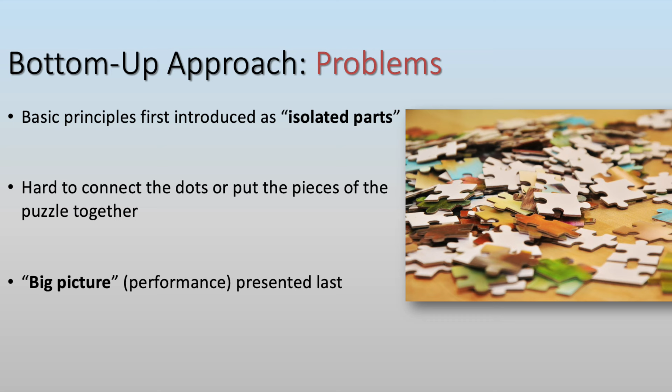I just wanted to make one point to CFIs on board. This top-down versus bottom-up approach, which I think is genius, that puzzle with all the pieces in the box and no picture, is how some CFIs teach. They give you the little parts and they don't show you the whole picture. We should always start, like Juan said, top down, start with the big picture and then break it up into pieces and move down a level if you need to, but start with the basics and the large picture.